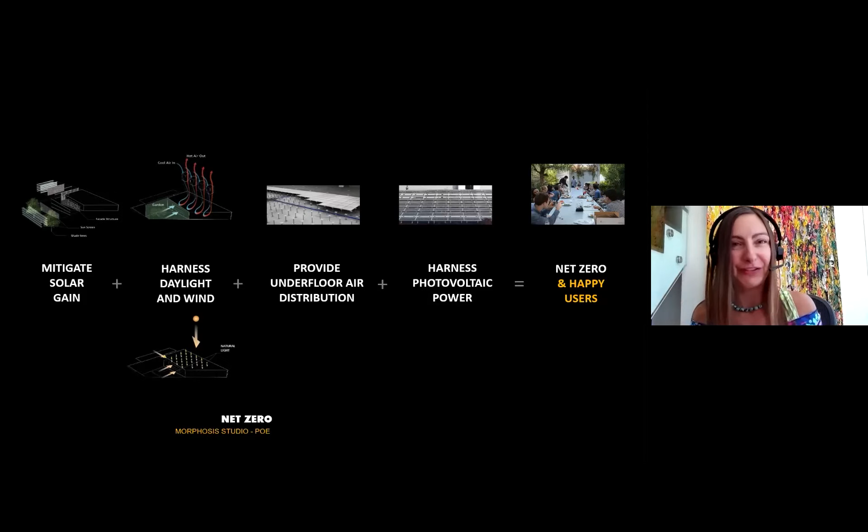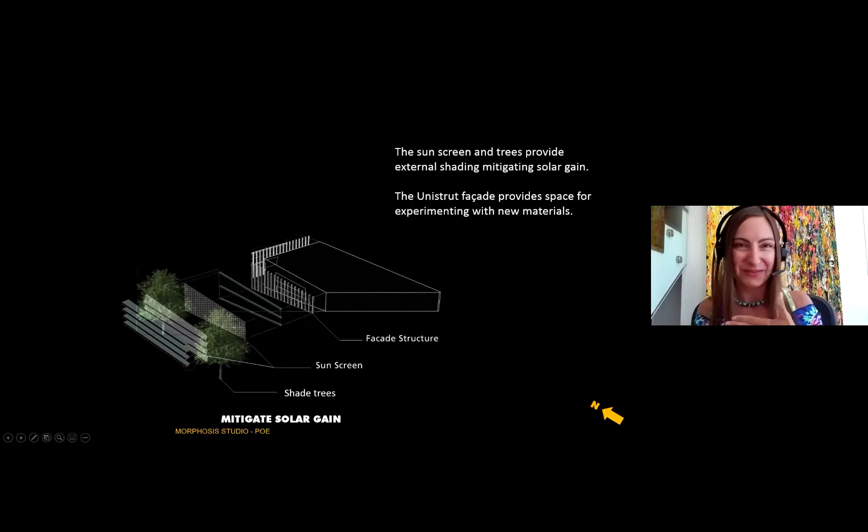So this is a slide showing a basic axonometric of the building. I have a north arrow here, so you know this is the north facade, and over here we have our west facade facing the garden. And the other two facades, the south and the east, we didn't have windows in those. The south facade is actually up against the train. We're right up against the train in Culver City, so we hear that all day.

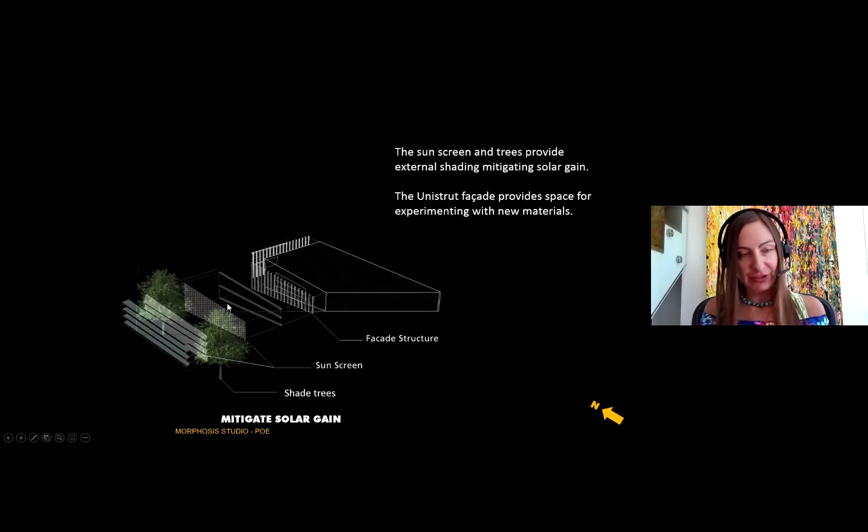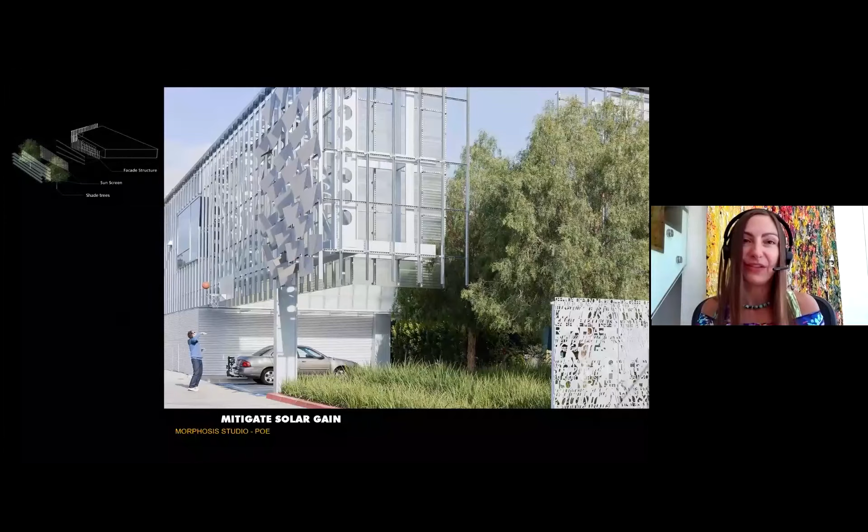But you can see, I'll show you the next image, how the trees really provide a lot of shading to those large windows that we have facing the garden and facing the west. The foliage does a really great job of shading that facade. And the other window is actually on the north. And then we have skylights on our roof, and they really have a gorgeous diffusion of light coming in through the space. They really fill the space with such a beautiful soft light. When clouds come over, you can actually feel it in there, so it changes while you're inside the space, almost like you're feeling nature inside the building.

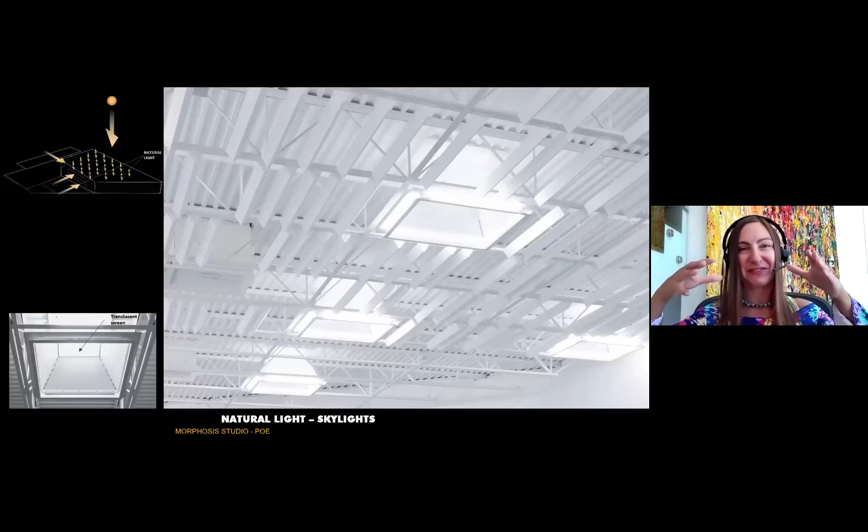Yes, so together with the skylights and these large windows, we get ample light coming into the office, mitigating the need for much artificial lighting. So this is an image of the inside of the building, looking up at the skylights. The skylight's actually quite small, and then there's a pyramid shape that opens up that diffusion of light, so it expands and then it comes into the space. At the top of that opening skylight, we actually have a translucent screen.

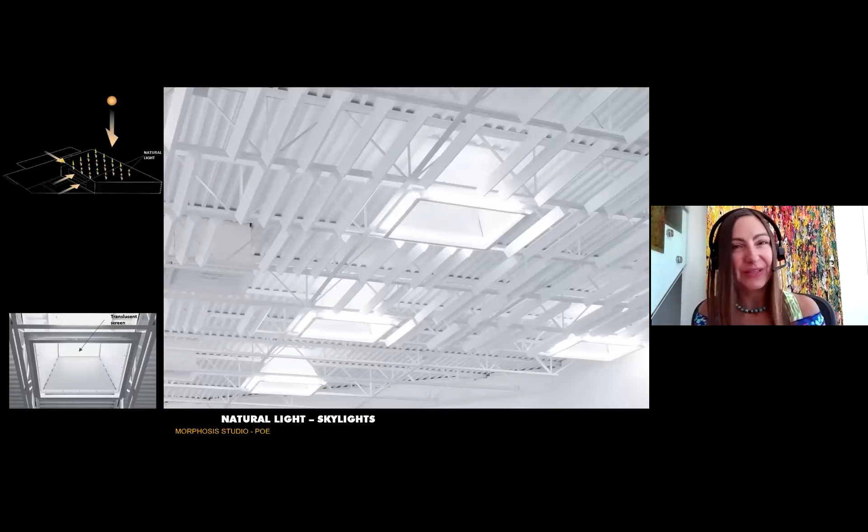And I do want to share this, that it took us a couple of months to get that screen on. So there were moments in the office when the light would come and shine on you, and we'd make an internal joke that you were the chosen one at that occasion, and possibly the chosen one to go get a cup of tea at that moment. But this lady put her sunglasses on and powered through it. But we do have the translucent screen now, so we don't have to worry about that.

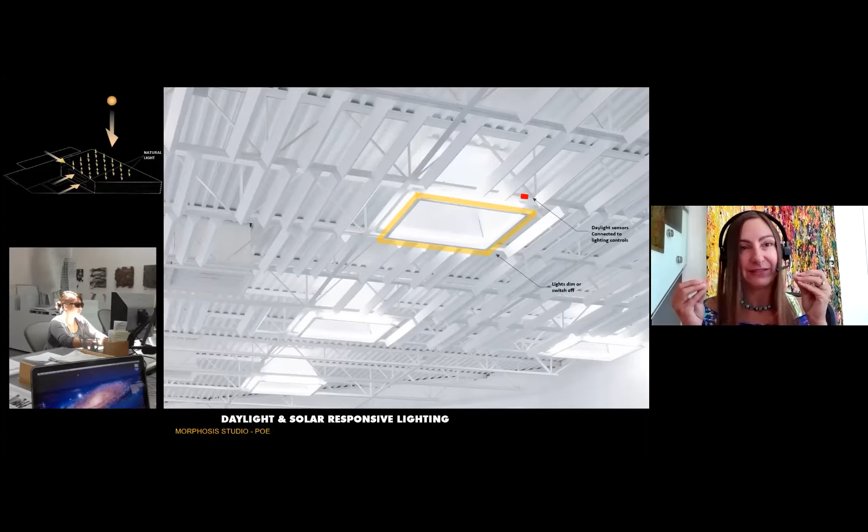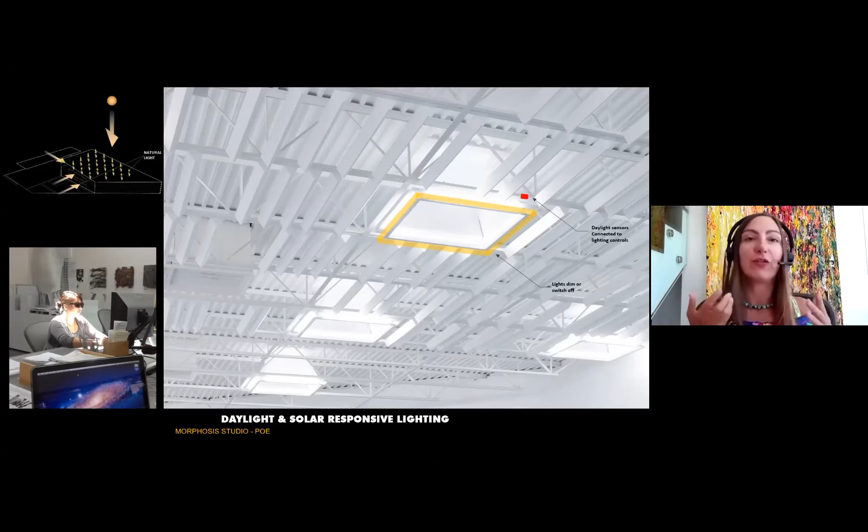But with this slide, I did want to talk about the artificial lighting, because we do have lights all around the skylight, as I've noted in yellow. And we have these daylight sensors that are connected to the lighting controls. These lights, depending on the light levels inside the building, will dim and switch off or on. And it's very gradual, very seamless. We basically don't notice when they're switching on or off because it's such a slow transition.

Then natural ventilation really plays a major part in our office. We do have those large windows that I showed you upstairs, downstairs, and on the north facade. And we also have these large doors on the north, which also open up.

But the main prevailing wind is coming from the west to the east in Culver City. And so these openings that face the garden too, they are predominantly the ones that affect the flow coming into the office. So those openings, together with our Monodraught wind catchers, provide that ventilation through the office.

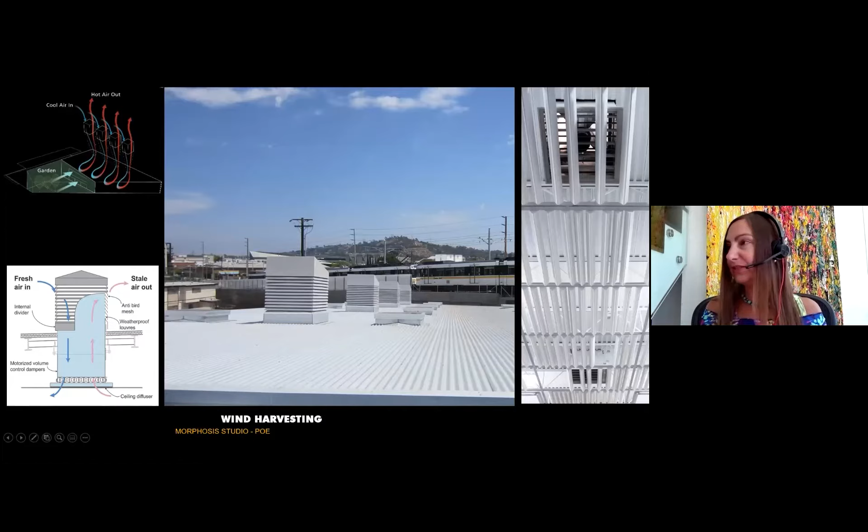And this is the stale air that comes out. And even on the other side of the wind catcher, some fresh air can come back in. It's directed by these louvers and comes into the space. And I have a little image of a wind catcher up here from below. I used to sit under them for a long time.

And this is an image of those sliding doors. Now, what you don't know is that these sliding doors don't just open once, they open twice. So this door nests onto the next one, and then both of those nest onto the one on the right. So the whole space opens up, and it's a massive opening.

I mean, in our office, in the time that I've been there, we hardly ever put any cooling for the space. In winter, it can get cold, and sometimes it's the jacket or the heating, and we do both sometimes. But cooling, it's a very cool space in the office.

And then this is the image of the underfloor heating and cooling. As I mentioned before, it's great because it's adjacent to the user, which means that you just have to heat and cool the space immediately in contact with the user, and you don't have to heat the whole volume in order for them to feel the temperature change.

And there's a lot of flexibility under there. You can add, remove vents as needed, and there's user controllability, so you can open or close the vents if you want to while you're inside the building. If you're cold and cold air is coming out, you can close it.

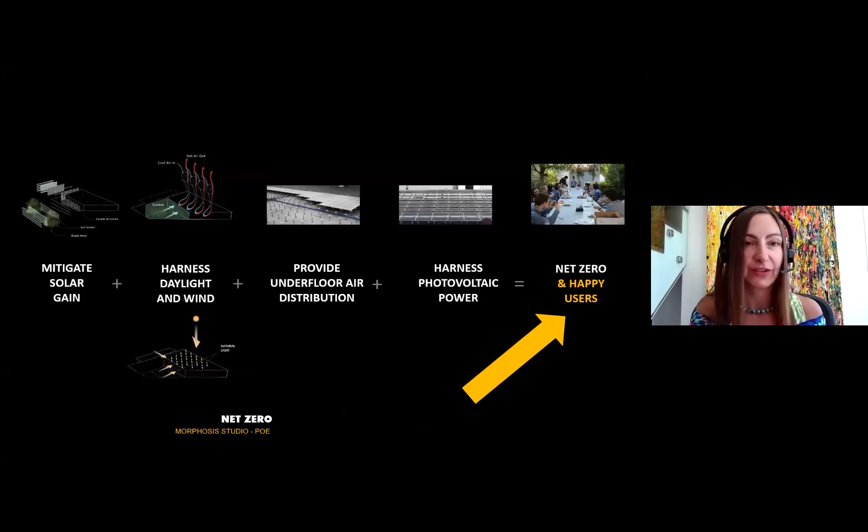And so, as I was saying, our net zero goals are running hand in hand with creating a space that really will enhance the user experience. We want to make sure that everybody is happy to come to work every day. And so after the design was realized, we wanted to test out our building. We've made all these measures to create and design what we wanted in a net zero building.

But what is happening? We wanted to understand what is happening with our building. We wanted to learn how we could do things better. Could we change something? Could we change the way we use the building? How could we use the space in a better way? We wanted to become more knowledgeable as well. How could each individual make a difference in the amount of energy produced by the building? And this is why we carried out our post-occupancy evaluation. We wanted to learn how the building was performing and how we could make it perform better.

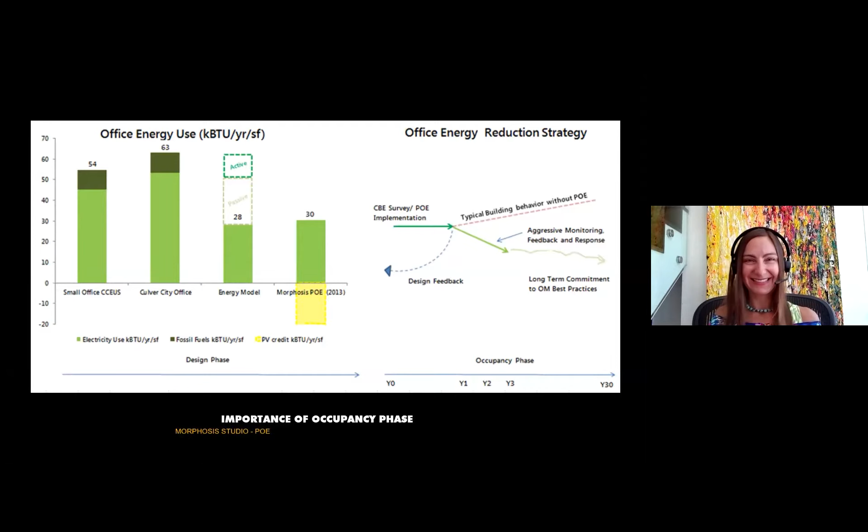Thank you so much, Natalia. I'm realizing it's so hard to follow you. I have charts and numbers, those beautiful imagery. But thank you for setting the stage.

So at Buro Happold, we did the MEP engineering, the lighting design, energy modeling, and the computational fluid dynamics modeling to help Morphosis meet that net zero goal and have a really healthy workspace. We did a deep dive with them on that engineering and analysis. And then we got to continue to be engaged with the building and with Morphosis on the POE. So I'm going to go through some of those details with you now.

So, oh, sorry. Let me just make one. Okay, thank you. So the bar chart here on the left shows the energy use intensity for the project, and we reduced that using passive, active, and renewable strategies. The two bar charts on the left are the benchmarks. The third is the modeled performance, and the bar chart on the right is the actual performance.

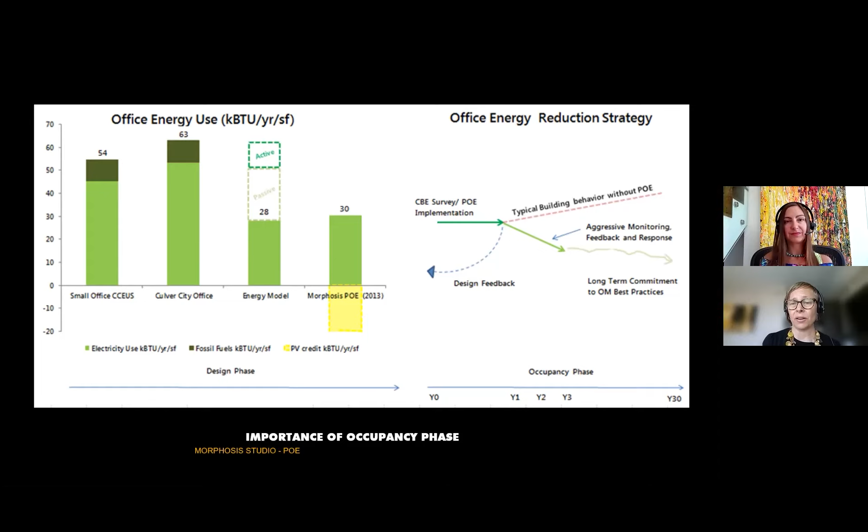The passive and active design measures led to a 50% reduction in the office energy use compared to the similar benchmarks of a Culver City office space. And then with the inclusion of the renewable energy, the reduction compared to the benchmark was 80%. And that chart on the right really just shows the importance of design feedback during occupancy. When a building goes unchecked, the energy use increases, and that also typically is paired with occupant dissatisfaction. Okay, so next slide.

So W. Edwards Deming once said that without data, you're just another person with an opinion, which I think is just so true, right? So it's so important to get the data and to analyze it. And POE just provides us with such a huge opportunity for design teams, but also for the owners. And we really need to push to stay engaged with our projects and not be locked out as soon as

it's complete. So POE really allows us to help understand how the building's performing, how we can further optimize its performance, what impact our design and building are having on occupant productivity, health and well-being, and satisfaction.

And it's also a really good opportunity to engage the occupants of the building so that they're much more aware and understanding of their behaviors and that impact, especially when you're trying to meet these really high sustainability goals around net zero, net positive, energy, carbon, waste, etc. Okay.

So this is the equipment that we used. I'll start on the left: it's a digital HVAC analyzer, and we use that to check the air supply flow rates. The next one is relative humidity and temperature. So we recorded measurements at 4 different spaces throughout the office to determine the thermal comfort conditions. We used light meters to determine if the skylights were providing adequate light or too much light.

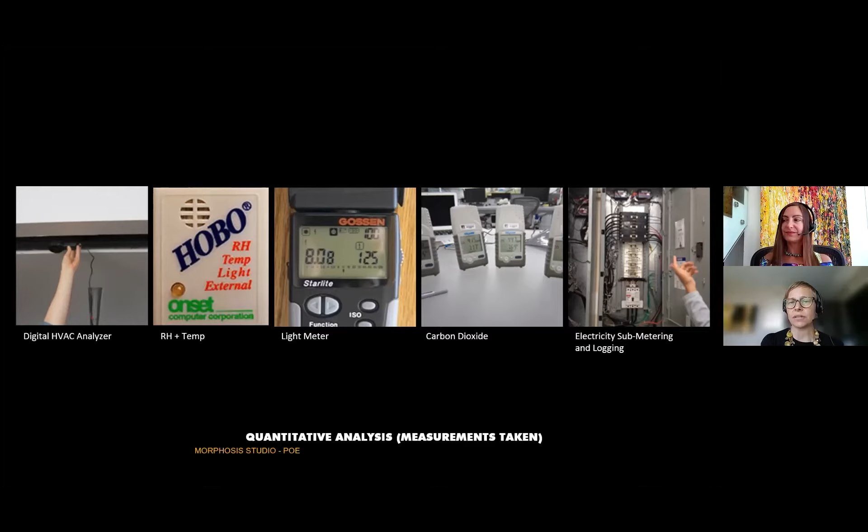The next is the carbon dioxide monitor and tracer gas test that confirmed the air exchange rate and the effectiveness of the ventilation in the Monodraught units. And then we also did electric submetering. So that really provided us with a more in-depth analysis of the energy use breakdown. And it also allowed us to look at the solar PV array to see if that was operating as we would expect. Okay, next.

So this radar chart shows the outcomes of the occupant survey that we did with the staff, with the center being dissatisfied and the outer ring being very satisfied. And so you see there in the red is an average building, orange is an average green building, and then the green is Morphosis Architects. And as you can see, their office is performing better across almost every aspect of occupant satisfaction.

And 85% of the occupants felt very satisfied with the overall performance of the building, and 80% of the occupants felt the building is improving their productivity. So when you look at the numbers and profitability, right, that's huge to have 80% of your occupants feeling more productive than they had been in a prior space. And due to such high levels of occupant satisfaction across all these categories, the project actually received a Livable Building Award from the Center for the Built Environment.

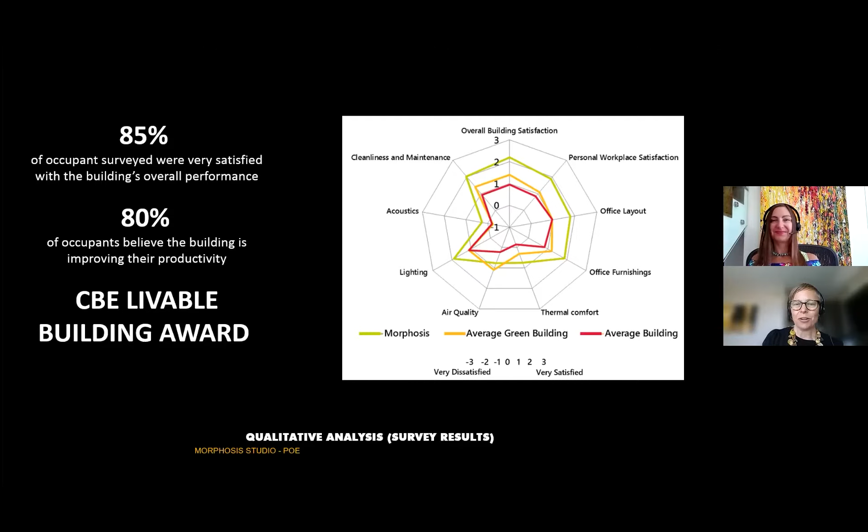And the space is just so beautifully lit. Natalia and others have said when the lights come on and off, they don't even notice. It's just so seamless, and they really don't come on until late afternoon or into the evening.

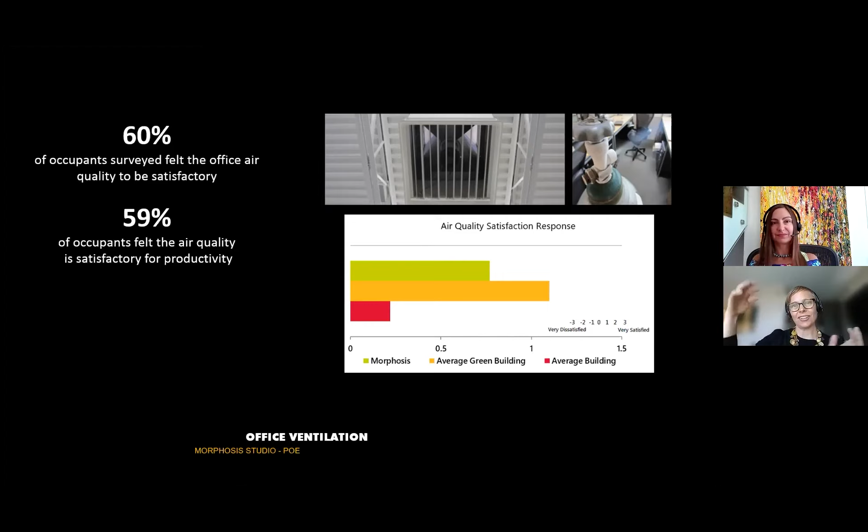And then Natalia also talked about the underfloor air distribution, right? That's a great strategy for supplying fresh air much closer to the breathing zone, and, as she said, not having to condition much of that high volume space that they have there. Okay. And then the next slide is the satisfaction levels with thermal comfort.

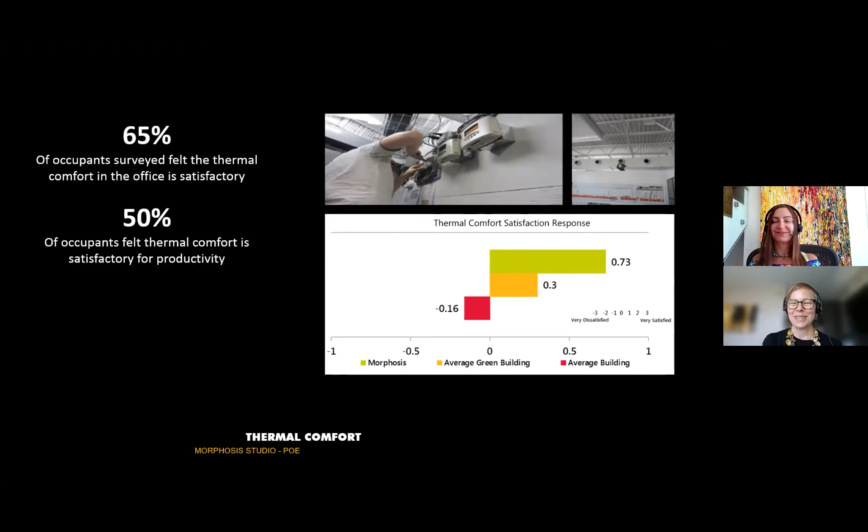And I guess about 2/3 of the Morphosis staff felt that the thermal comfort in the office was satisfactory. Thermal comfort can be a tricky one, but actually 2/3 is better than most offices. Okay, next slide. So here's some concrete examples of the improvements that we made as a result of the POE.

So on the left, that's some of the windows upstairs. There weren't blinds added initially, so the staff sitting there were having some issues. So blinds have been added subsequently. The next photo, that's somebody changing out the wind catcher control sequence.

What was happening was the temperature band between when the heating would stop, and then when the wind catcher would open up, thinking the space was too hot, was too tight of a band. So the underfloor air would kick in, heat up the space, and then wind catchers would say, "Oh wait, it's getting too warm in here," and it would open up and then flush out all that air. And then we were able to expand that temperature band with the control sequence, and that was a big energy savings.

There's one of my colleagues who's literally just changing the air nozzle diffuser up there because one of the staff members was getting a little bit too much of the airflow right on her at her desk. And then, as Natalia said, originally the fabric diffusers were not in the skylights, and those were creating hot spots for the staff. You saw the sunglasses, so those fabric diffusers were added in.

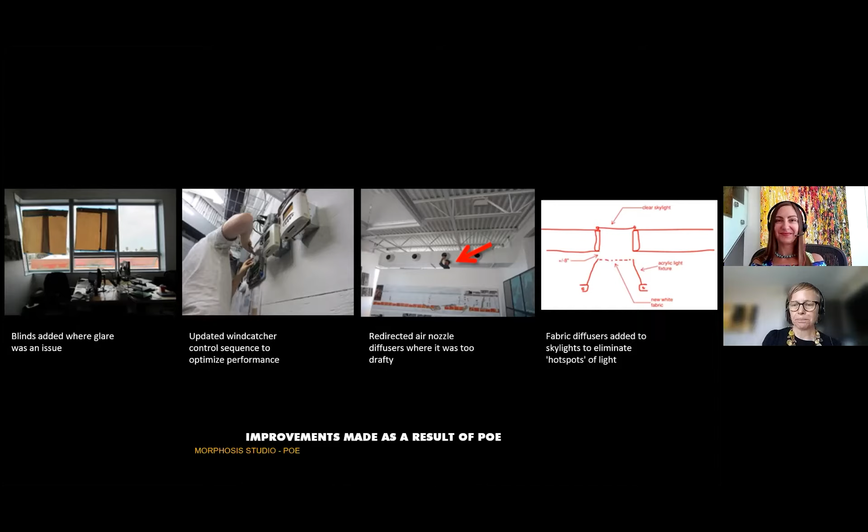And the next slide. We also were really closely monitoring the PV array and its performance. And we noticed it was degrading a lot more quickly than we anticipated for a new photovoltaic array. But there was construction happening close by. So we recommended to Morphosis that they clean the PV arrays. And so those three areas, the three red arrows, are when cleaning was happening. There's a lot of construction, a lot of dust at that time in particular. And every time they cleaned them, you could see the efficiency jump back up of those PV arrays.

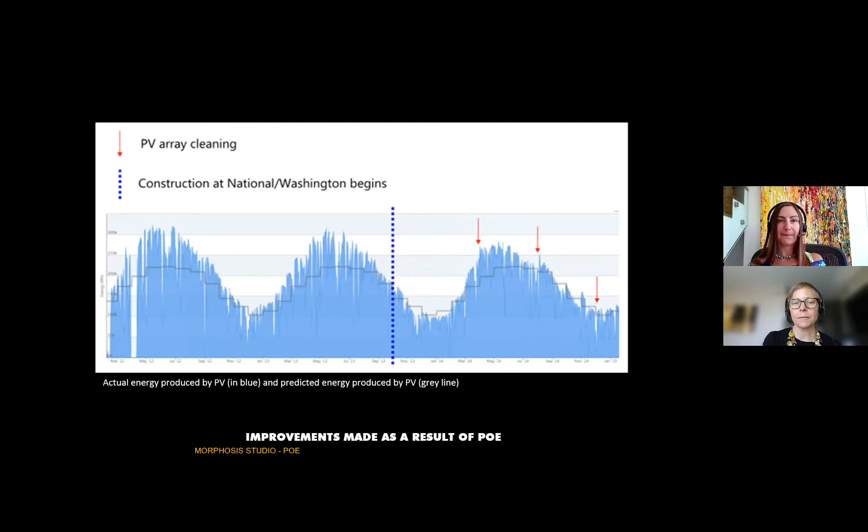And so I imagine Natalia and colleagues would have cleaned the PV arrays, but if we hadn't been looking at that data and scrutinizing it as early as we had, it probably would have gone unchecked and continued with subpar performance. Okay, next slide.

Okay, next slide. So just to wrap up this case study, the Morphosis staff has really demonstrated significant improvement in productivity through that occupant survey that we rolled out, and that really has a substantial impact on their profitability. And Morphosis is one of the most energy efficient commercial buildings in the nation. It's also all electric. I'm not sure if Natalia and I mentioned that early on, but that's also really important. And the building generally is exceeding the occupants' expectations.

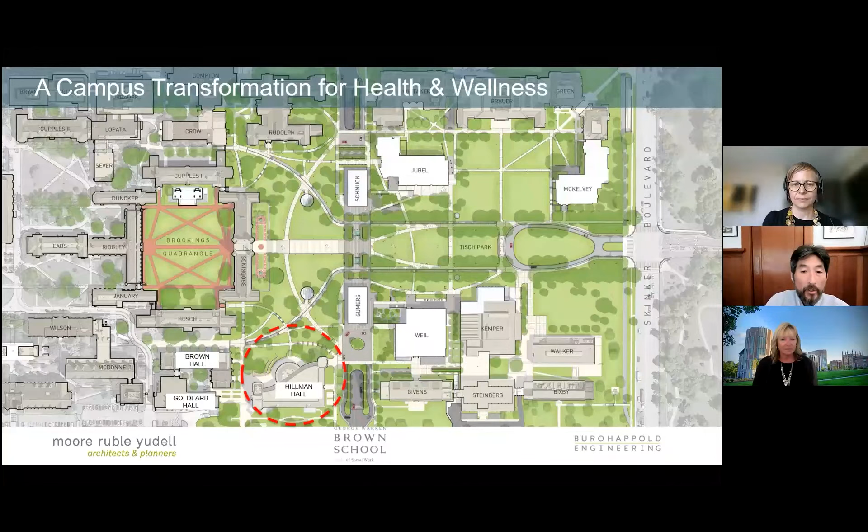And Amy will go through some of their goals and objectives, and talk about this really unique opportunity that we had to engage with the formal research project that has been published. So Hillman Hall is really the first of a number of projects on a very ambitious project called the East End Transformation, where it's one of 6 new buildings, an addition to a museum, and an underground parking garage. So we were the first building there on the hill to do this.

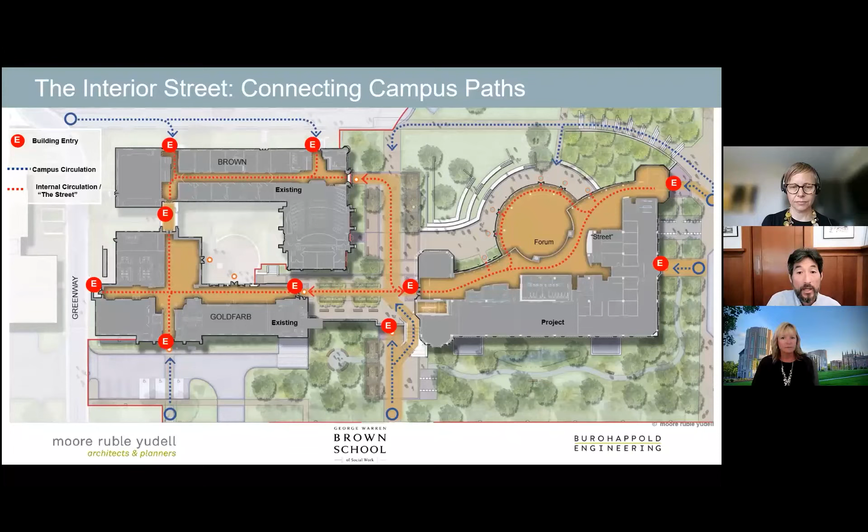So Hillman Hall is on the right-hand part of this plan diagram, and it completes the Brown School campus as an ensemble of existing buildings, Brown Hall and Goldfarb Hall, and it connects the circulation paths both internally and externally to really make this a cohesive campus within a campus. And it's also, as I mentioned, on the downslope of the hill. So Hillman Hall actually made the whole site much more accessible. So you can actually use the building to navigate a lot of the changes in topography.

So what we started out with before any design occurred is we had these workshops that included not only the dean and faculty and students from the Brown School, but other key administrators from the university, and also some key members of our design team.

Great, thank you, Neil. It was just a wonderful summary that you provided of the project, and great memories for me, for sure. So the Brown School is on the Danforth campus of Washington University in St. Louis, and the school is home to 3 different graduate school programs: social work, public health, and social policy. And these 3 fields, the core tenets of social justice and health and well-being, are integral to what faculty teach, what students practice, and the whole sense of the school.

The school was first, could you go back 1 second? First founded in 1925, and as Neil said, it consists now of 3 buildings. In 2008, the school started a program of public health and almost doubled in size with faculty and research centers. And that's why we needed this new building, and started to collect data on the best ways to do that for the Brown School. Next slide.

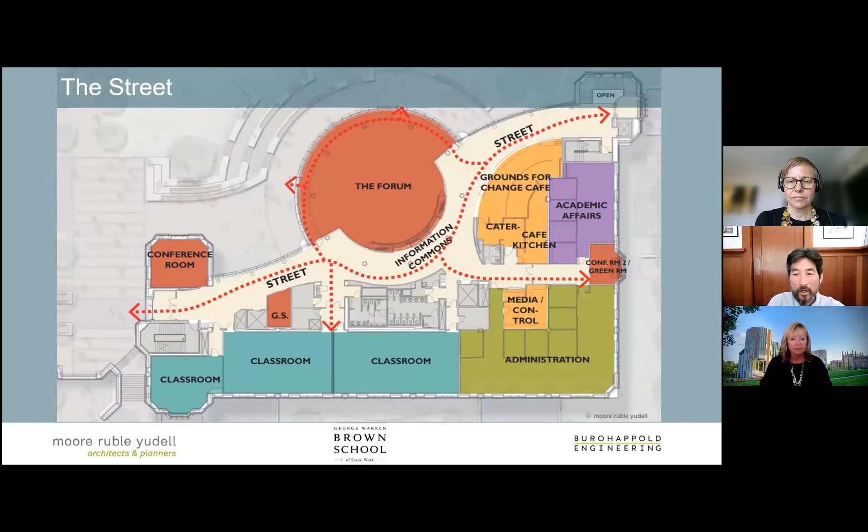Great. Thank you, Amy. So one of the organizing principles of our building design was to create a very clear circulation path through the building. And that manifested itself in the creation of what we call the street. And along that street are a variety of program uses that contribute to the mixed community that Amy was talking about. And then at the ends of that street, we strategically located what we called social stairs at each end.

And it's kind of casual interaction. But that same space can also be used for much more formal presentations. It has great acoustics. There's a lot of controls for lighting and AV recording and broadcasting capabilities.

As I mentioned before, circulation and physical activity was built into the design of Hillman Hall. And one of those elements is the social stairs, which are designed to be wide and spacious, have a lot of daylight being brought into them, and afford views out into the landscape. And it provides a really attractive option to using the elevator.

The other interesting feature about this project is that we included a cafe called the Grounds for Change. And that Grounds for Change was really intended to feature healthy menu options, which is affecting physical health. And the interesting thing is that the food service provider works with local restaurateurs to feature some of their rotating menus, and is also a social engagement feature of the project with the community.

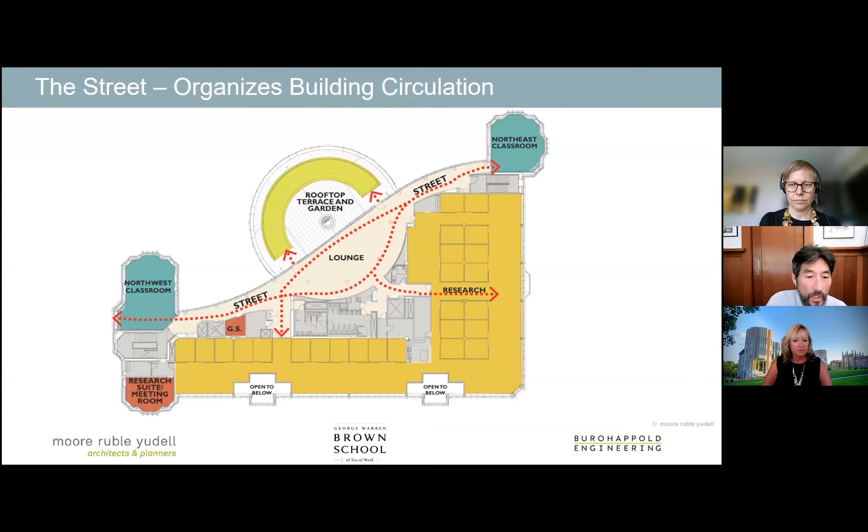The street continues on the upper floors, where we have primarily research offices for faculty, but it's also mixed with classrooms and social gathering lounge space. And also, if you notice where the open to below notes are here, we have two interior gardens, which I'll show you some images of later on in the presentation.

Ergonomics was really important for us when it came to outfitting the office spaces. All the private offices have sit-stand desks, which has become a very popular feature. And then another initiative to promote more physical activity, we banned private printers from the private offices. So there are shared printing stations that occupants get up from their desk and walk to. And that not only provides some additional physical activity, but also social engagement.

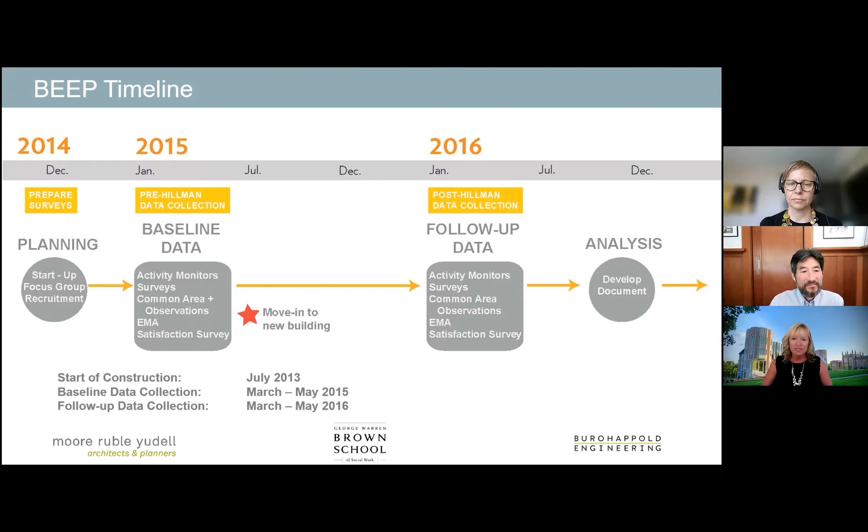So just to give you a little bit of a timeline here, in 2014, after those meetings that helped lay the foundation for the design of the building, we started to prepare the study. As I mentioned, we call this a natural experiment, but we're also limited in time; we have to hurry up and collect data before the building's built and people move in. So we planned to collect data in many different ways, which I'll show you in a minute. We measured prior to moving in the building, in 2015, and then one year after, in 2016. It takes a long time to analyze data because we collected so much of it, but then in 2018, we published a research article as well as the toolkit.

So our study got lots of press. We have a great PR department at WashU, and we presented the study to them, and they presented it to the press, and it was published in the Wall Street Journal, as well as several other outlets, about the importance of these indoor workspaces to health.

So as I mentioned, I'm a physical activity researcher. So we were interested in movement between buildings and sedentary behavior. Sitting is the new smoking, and research shows that even if you exercise, if you sit for prolonged periods of time, it changes your metabolism in a negative way. So getting up and moving around is really important, thus the standing workstations. And then the team science part, the collaboration: we wanted to scientifically measure changes in collaboration through a bunch of different mechanisms, like looking at chance interactions and social networks.

So we took advantage of all this new technology that was coming out, though it's not so new anymore. We used activity monitors, ActivPAL, which I'll talk about in more detail, and ecological momentary assessments. These are real-time data collection text messages. You get a text message at certain times a day, very quick, asking you a question, and we used that to collect data in real time. We also used surveys on physical activity and workplace satisfaction.